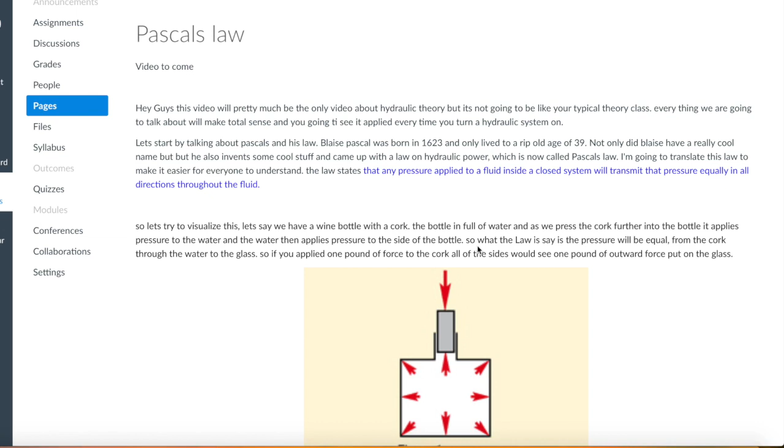I'm going to go ahead and paraphrase or just kind of translate the law into something everybody can understand these days. So I'm just going to read it off. Any pressure applied to a fluid inside a closed system will transmit that pressure equally in all directions throughout the fluid. So we're going to go ahead and just roll down here. I hope this doesn't confuse too many people. And we're going to talk about figure 1 right here.

So I think we call it in the description a wine bottle with a cork in it. So we're going to pretend this wine bottle is full of hydraulic fluid, just so nobody gets mad. So the actual cork here is this gray object, and let's say that this wine bottle is full of oil. As we push that cork in, that oil is going to pressurize, and that pressure is going to go equally out. It doesn't matter the shape, it's going to go out in all directions equally.

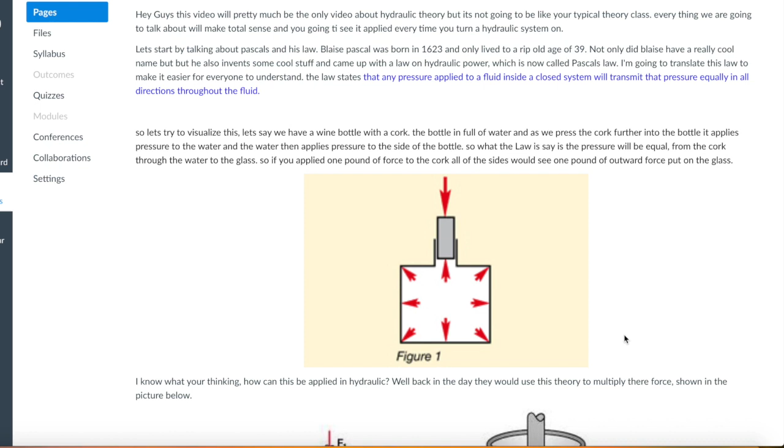It doesn't matter at all. It could be any odd shape. You can see those figure 8 glasses or figure 8 bottles. They'll do the same exact thing.

So let's say we're putting 5 pounds of pressure on this cork, and it's pushing into the bottle with 5 pounds of pressure. Now that means each one of these red arrows is signifying 5 pounds of force going out. It's equal, and it's directly equal with what's going into it. Okay, so if you put 5 pounds here, you're going to get 5 pounds coming out. If you put 10 pounds in, you're going to get 10 pounds pushing outwards in all directions.

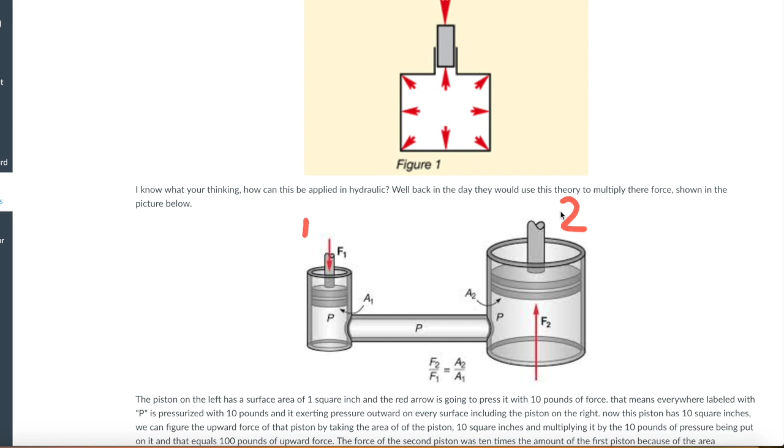So we got piston 1. We'll go ahead and name this one piston 1 really quick. This one over here would be our cork, our cork to our wine bottle, right? So let's say it's got an area of 1 square inch, this piston right here. Now we got piston 2 over here, and I'm going to go ahead and write piston 2. Piston 2 over here has got 10 square inches of area.

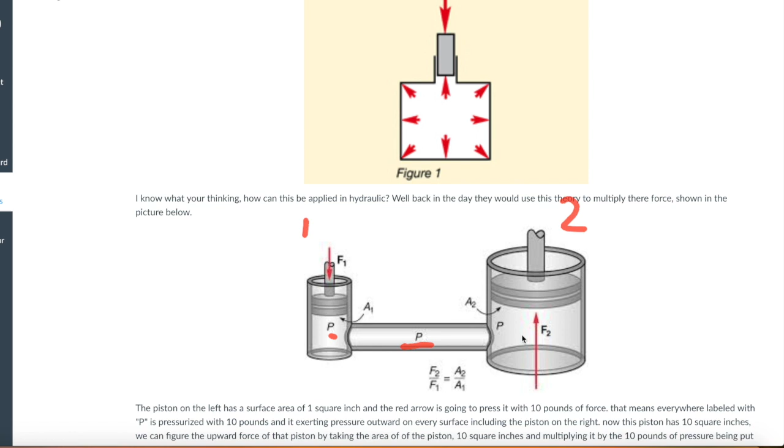So if we go and we push down on this piston with 10 pounds, that means everywhere with this P on it, I'm trying to underline them all with the P, it's going to have 10 pounds, and it's going to be equally pressing outwards on all sides. But all the sides won't move, but over here piston 2 will move up.

So now this is the multiplication factor that we're going to talk about a little bit later on, but you're going to see that this is one square inch. Well, this one over here is 10 square inches. So it's going to be multiplied by 10. So if we have 10 pounds coming in, and it's going to be multiplied by 10 square inches, that means we're going to have 100 pounds of force going upwards on piston number 2.

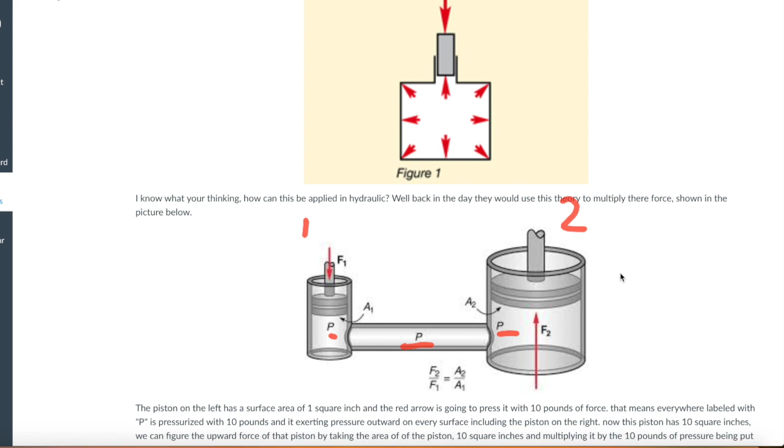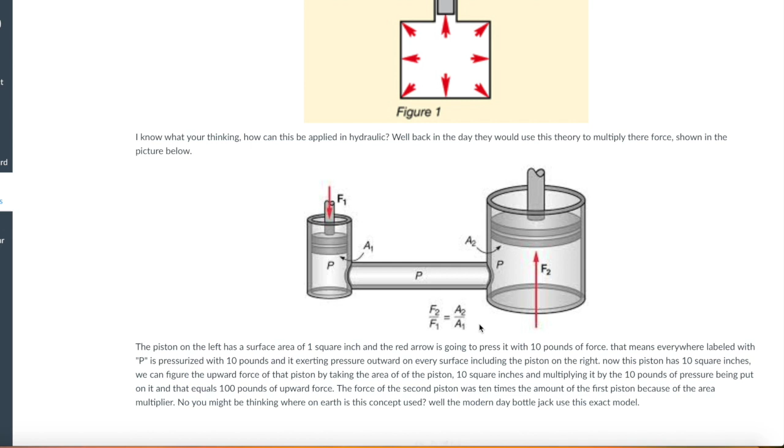Now, you might think that this is old tech or something like that. Well, it actually turns out this isn't. This is still used today. We're going to go ahead and roll down, and we're going to talk about a bottle jack. So a bottle jack is the exact replica of this.

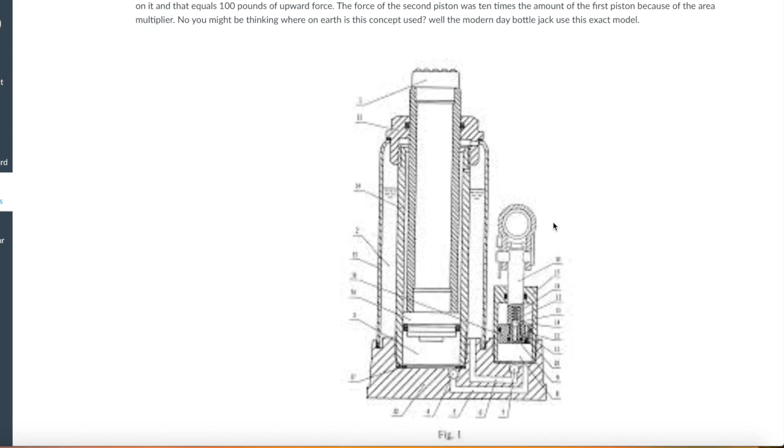It's got a small piston over here, and I'm going to try to underline it again. Small piston, big piston. Now, we can pretend that this one over here is number 1, and this one's number 2. Or you can just call this one the actual pump, and this one would be your extension rod on your cylinder. So if you look at it really closely, the only real differences between these two things are there's a hydraulic tank, and it's inside here.

And that is a cylindrical tube that's actually going around that extension rod. And then right here, we've got some check valves. We're gonna talk a little bit more about check valves later on, but right now, to get the gist of it, it's just a one-way street. It only lets hydraulic pressure or hydraulic flow go in through one way and not the other way. And that's done with a spring and a ball and seat area, okay?

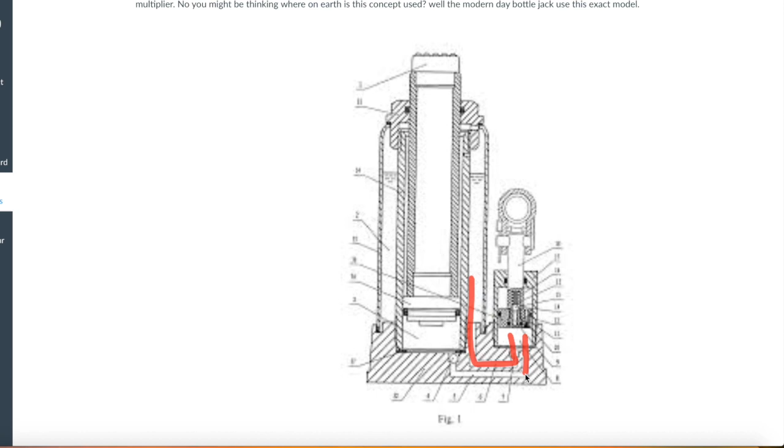And there's going to be a picture later on, but this class really isn't about check valves by any means. But those are the main differences. So let me go ahead and clear these off. So what happens is the oil is going to come out of the tank, and it's going to be gravity fed into this piston. It's going to go through this tube, up, and it's gravity fed into this piston. So the check valve is going to close, and then oil is going to exit out this tube and into here.

Man, my computer's freaking out a little bit.

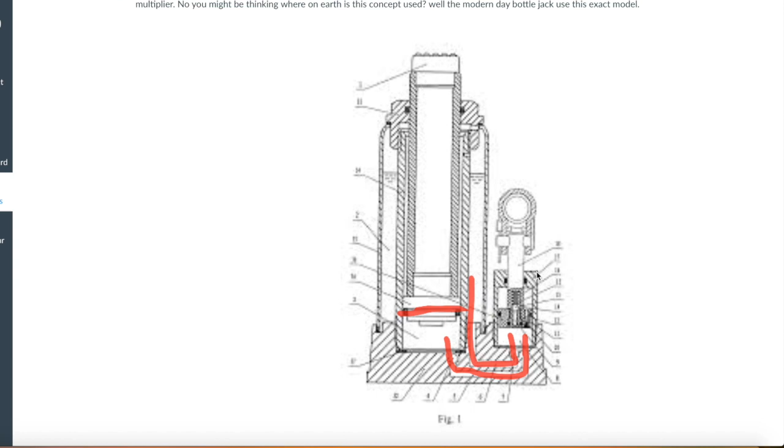And then there's going to be that mechanical advantage. So if you had 10 pounds of PSI coming out of this, and you got 10 pounds of PSI in here, it's going to multiply across this piston, whatever size it is, and it's going to go out. And that's pretty much the basic logic of hydraulics. You're going to see this everywhere, all over the place.

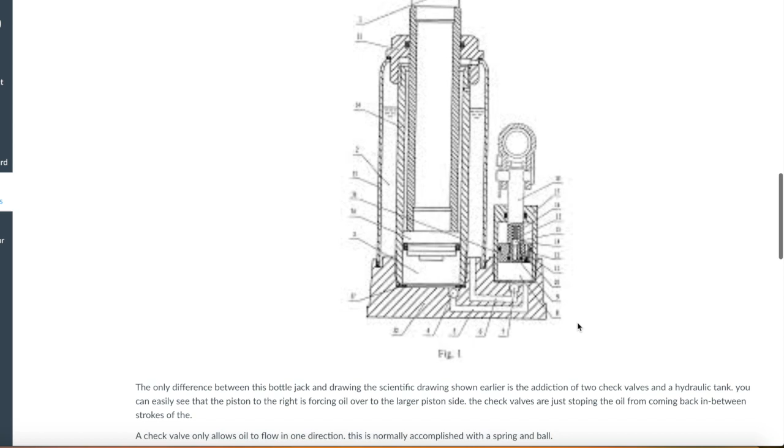Now, today, is there a more advanced way of doing that? Yeah, you could use a hydraulic pump. That's probably the main way. I don't think any actual hand jack is going to be done like this, but anything that's actually engine driven or motor driven in any way will be with a hydraulic pump.

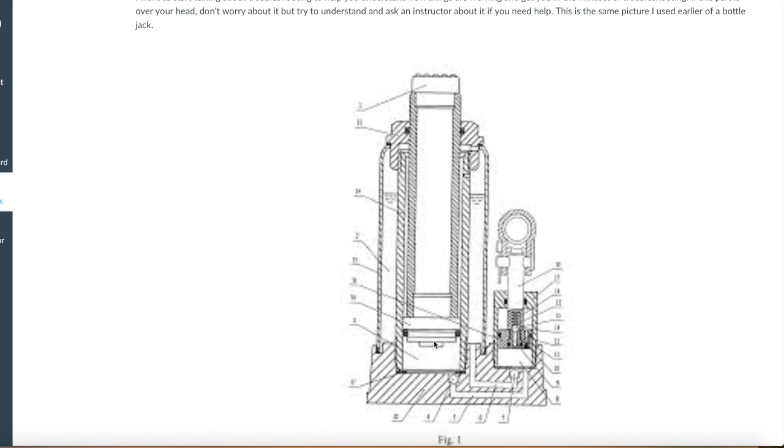I'd like to take a second, though, and throw in some troubleshooting stuff. I know you guys don't totally have a great grasp of what hydraulics is yet, but I'm going to start throwing in some troubleshooting to get your mind working a little bit. So we're going to roll a little bit further down on the page here, and we've got the same exact hydraulic bottle jack that we had. This is pretty much how any bottle jack is anywhere. This will be in the back seat of your car. They're all pretty much built the same way.

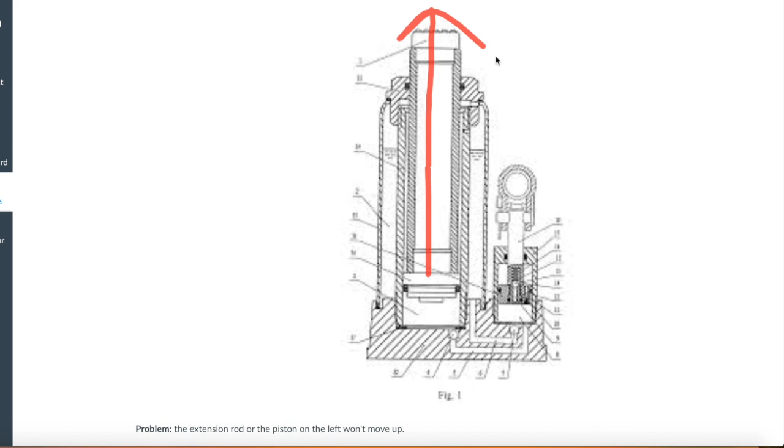So the problem I've written here is the extension rod won't go out. So this being the extension rod, it will not go out. So what things could possibly be going wrong to make that bottle jack not extend? Well, we've got all this oil in these reservoirs over here. Typically bottle jacks leak and they don't get used a lot. So I would make sure there's oil in it. Oil is kind of like the gas in your car. If you don't have gas in your car, it's not going to go. So first things first, check that oil.

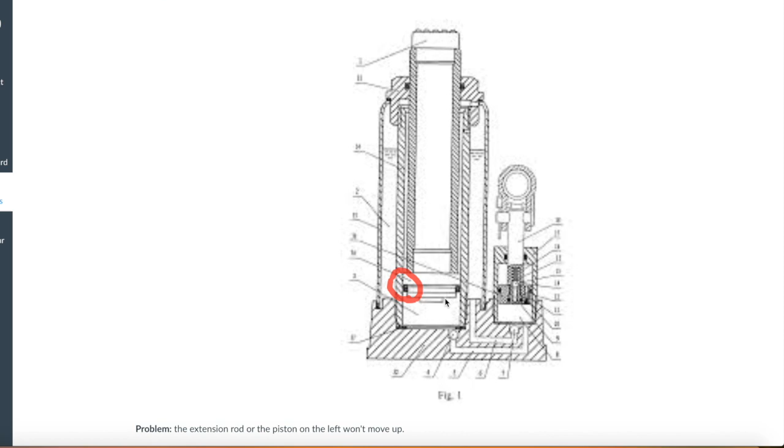If you are low on oil, you're going to notice it operating funny. It'll go up for a little while, then it'll stop, or it'll jack like half of a stroke, and then it'll go back down. It's kind of a weird phenomenon there. Another thing that could be happening is you can see this little black dot right here and right here, on both sides of these, and they are the seals that seal the piston to the actual cylinder bore. If those seals are worn out in any way, oil will just go right by them, and you'll never be able to build pressure.

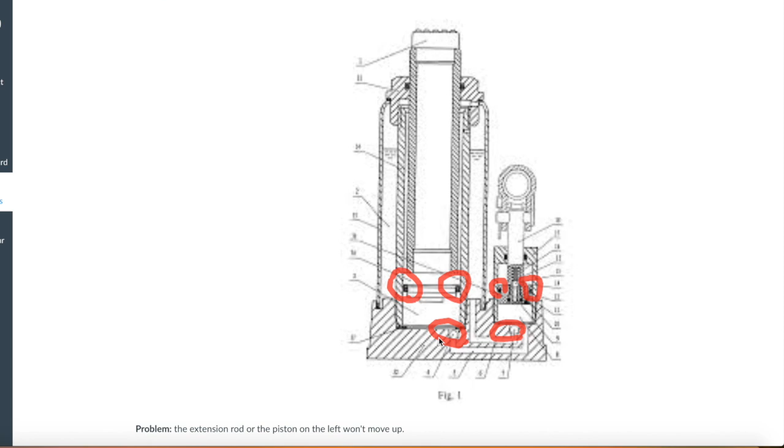Could also be you've got a bad check valve right here, that the check valve's not letting the oil go through it. But in reality, as you're troubleshooting stuff and you get a better understanding of how hydraulics work, there's only like 3 or 4 different things that could really be going wrong with it. So just trying to get your mind going there. If you got any questions, please come talk to me. The bottle jack is a great image of the basic hydraulic system.

So that concludes our whole section on the theory of hydraulics. If you guys got any questions, please come talk to us. This is a really fun topic.